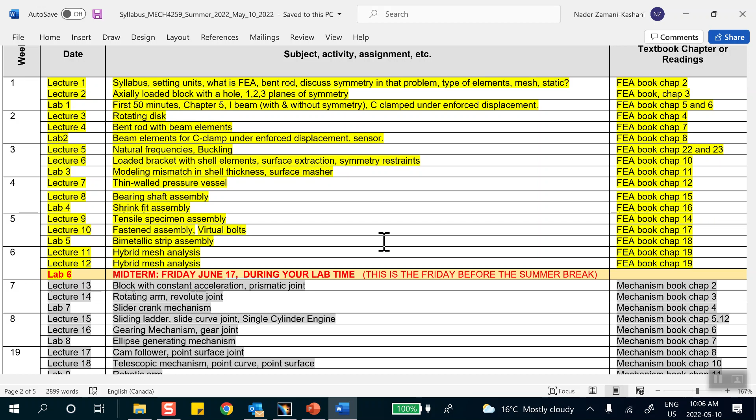The course syllabus on a day-by-day basis is here. There may be some changes, rearrangements, something may be left out, something may be added. I'll tell you, okay? But that's what it is. The yellow stuff is before the midterm. After the midterm, if you want, burn your book, burn your notes, because the subject is going to completely change, and it's not going to cover the stuff that you already did. And the final exam is not cumulative, okay?

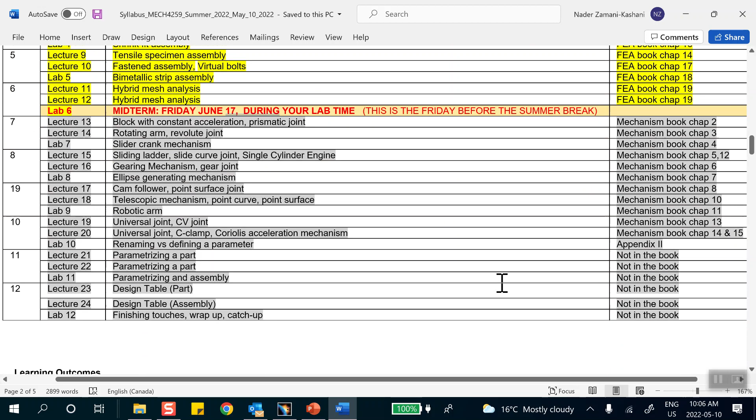There's your midterm. Oh yeah, lab 6, yeah, that's good. These are important things that you can read. It has to do with accreditation. As far as the breakdown of the marks is concerned, 10 assignments. Remember, there are 12 labs. One of them is for midterm, so that leaves you 11 labs.

One of them you can miss if you want, or if you got half a mark in one lab because you didn't do your minimum, let's put it that way, and you came to the extra lab, that 0.5 is going to get changed to 1. There's no problem. And at the end of the day, 10%, if you can breathe and you can be in the lab to show your work to the GA, you should be guaranteed of that 10%.

Okay? So I better watch what I'm saying, because these are being recorded and put on YouTube also, so it's not good.

Okay, the way these labs work is that I make a 50-minute presentation, 50 minutes, 1 hour, sometimes maybe 40 minutes. And then let's hypothetically say at 9:30, we give you an assignment. An assignment is a couple of problems, and we ask you to do certain things. Maybe do problem 1, maybe do problem 2, maybe do both, something like that. And the GA, once you're done at 10:30, not earlier than that. So 1 hour, we give you time to do something on it.

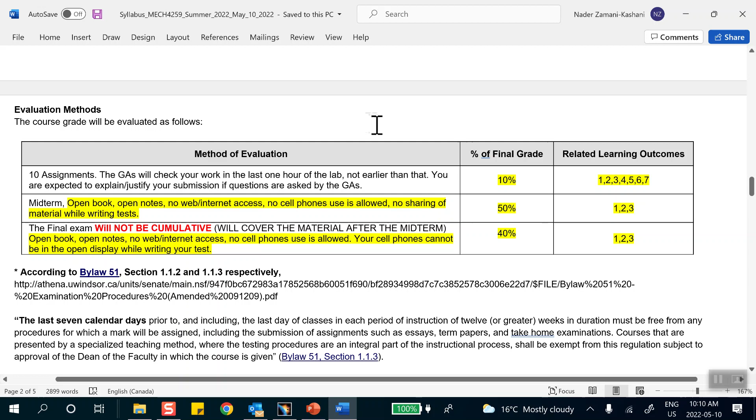Okay. As I said, if you miss the lab, unless it's a valid reason, a documented valid reason, we are not going to accommodate you. Basically, there's no makeup. It's around 1 point. But if you have a legitimate reason, it's okay. We'll accommodate you somehow for the 1 point. Maybe ask you to do a different problem, something like that.

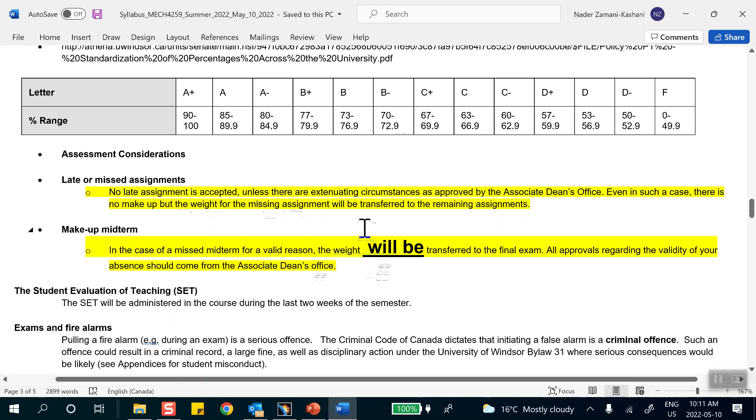Now, if the midterm is missed for a valid reason, and things happen, the weight is going to be transferred to the final exam. Okay, so there is no makeup. Even if it is legitimate, it's going to be transferred to the final exam. Okay. Now, yeah. Please make sure you read these things.

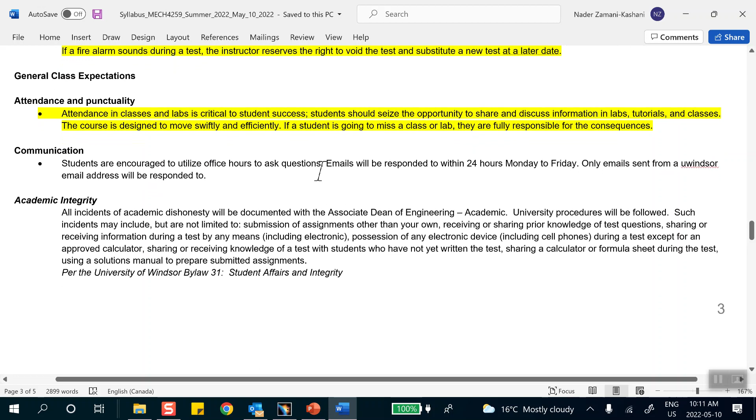There is something called supplemental privileges. Probably some of you know. If your GPA is such and such, and you have failed one course, the academic standing committee reviews your stuff. I think it's going to be sometime in October, and if they want to, they can give you a supplemental exam for one course.

There are supplemental privileges available in this course. Some courses don't have it, for example, technical communication and design and things like that, you can't go back and do it. But for this course, there is. We will give you the opportunity to basically redeem yourself, but that test is not going to be until December.

Okay, if you're given supplemental privileges, it's going to be in December, unless you're in Germany working for Schaeffler or some co-op in BC, something like that. Then I have to see how we can accommodate you for that supplemental. You don't have to come back here in December and write it.

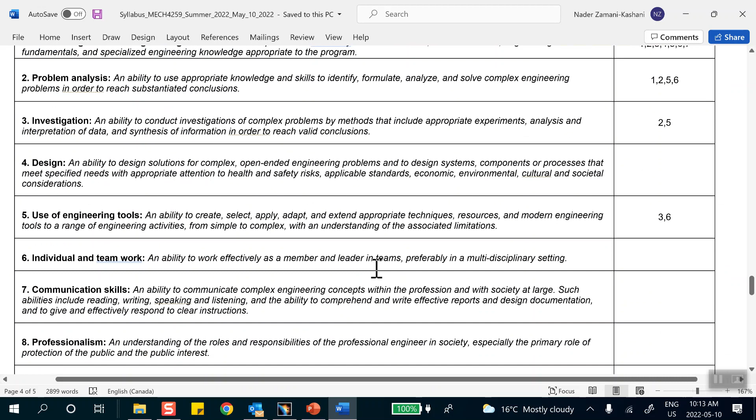Okay, there's really not much in this course syllabus. So let me go to the other document that also was posted. Where is it? Just bear with me for a second. This one. This also was posted for the past 2 weeks. And there's a couple of items that I want to bring to your attention. We already talked about most of the stuff that I wanted to, but

if there are any issues with your midterm, unless it's last minute, of course, that we'll look at later on, but if you know there's going to be a sister's wedding, brother's wedding, whatever, that you have to go to, please, in the next 2 weeks, okay? If you know it now, and it's a legitimate, reasonable request, you have to talk to me in the first 2 weeks. If you have letters of accommodation, first 2 weeks, okay?

I will contact those people who were allowed special accommodation, quiet space, and things like that. I will send them an email saying that you better do it in the next 2 weeks, because I don't want the day before the test, somebody shows up and says, I need special accommodation, I had the letter, because you're responsible for submitting those letters in the first 2 weeks of the course. Okay, good.

All right, now, everything is going to be recorded. This is stuff from last year, okay? I don't guarantee that everything was recorded and posted, including the midterm and the homework and the final, after the final was written, of course. But for example, if you go here, this is the lecture playlist. Let's see. The sound is not going to come out.

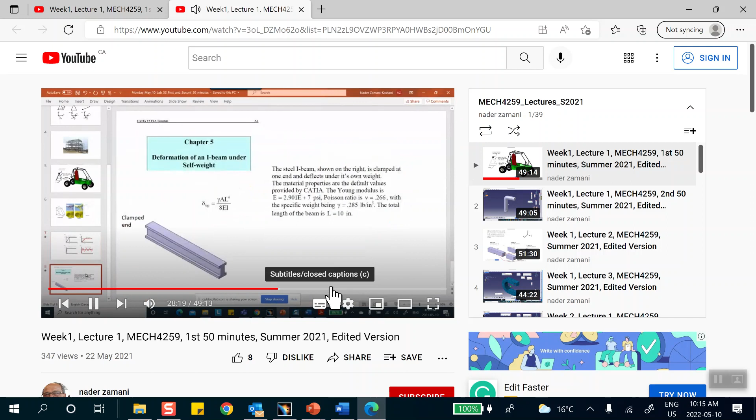Will be recorded. So you have many options: stuff from last year, stuff from 3 years ago, 4 years ago. Now, those were not your course that were recorded. There were other courses that I did some of these problems in, but it's a mishmash of different places in the channel. Okay.

Okay. What did I want to say? I think I said something. Any questions? No questions. Very good. Okay.

So let's get down to business, the real stuff. So we already did this. Now we're going to do chapter 2 of the book.

Okay. Now, for you guys, I have an extra 5 minutes. Good for you, probably, because I ran into some issues in the first lab. So they're responsible for that stuff also.

This is the kind of problem that you did in Dr. Green's class, stress analysis. I doubt that you did it in deformable bodies, but in stress analysis you did something called energy methods and solved one specific problem which should look like that, because it can be done analytically. Now, we're going to do it for this week. We're not going to do it with those little lines that you draw and say the cross-section is a circle and the I is this and A is that, etc.

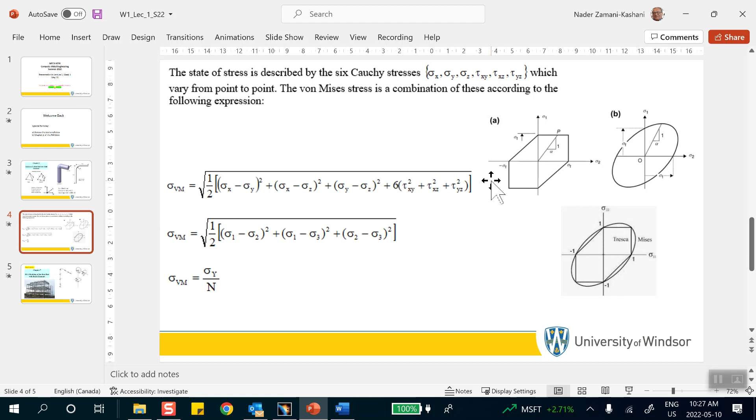Okay. Now, you might say, well, Dr. Green showed us how to do these problems with beams, and you're going to do that next week with beams. Well, why should I do this horrible-looking three-dimensional object, etc.? Hey, try to do this thing with those horrible-looking elements. Thousands of I-beams, etc. There's no way you can solve this with those solid elements.

So structural engineers, the first thing that they do is they model it as a bunch of beams, lines, frames, and things like that. And then get some information, such as displacement at the joints where an I-beam is welded to another. You get the forces there, a displacement there, and then out of that you can look at an I-beam as a unit, break out one particular I-beam, and look at the stresses based on the information that comes from the frame model. Okay. Anyway, so that's good. Any questions?

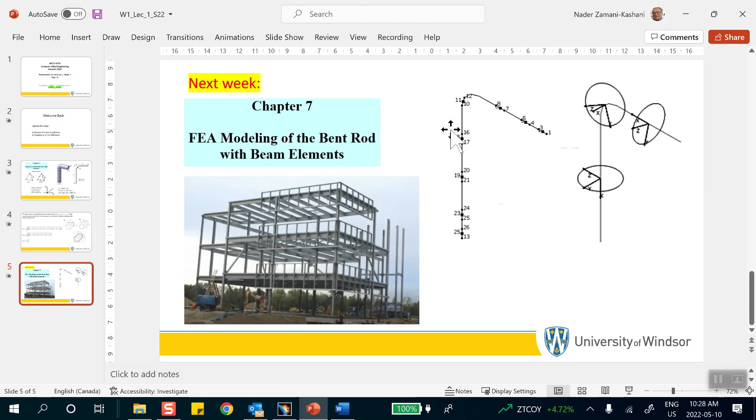All right, so we're going to do this problem. All right, so CATIA. When you start CATIA, by default, the way the system is set up, you can change these things, it gives you a product part. Products are a bunch of parts together, assemblies basically, and we're going to do assembly problems later on, several parts interacting. But for now, the first 3 weeks of the course are going to be single parts. So that being the case, I already killed that product screen.

Okay, I'm going to start the part. So it's a good idea to give these proper names. For example, my part in lecture 1. Because later on when you write a test, and there is an assembly of 4 parts, part 1, part 2, part 3, part 4, it's going to be tough to decide who is what. Okay, but here it's okay, I'll call it part 1.

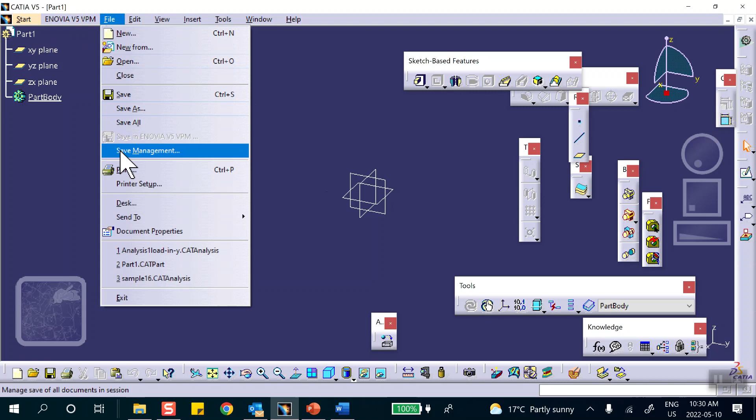But the first thing that I'm going to do, I'm going to save this, because I don't want my system to crash in 5 or 10 minutes when I haven't saved anything. It's all gone. So let me save this part in a folder that I can recognize. And the way I strongly suggest, go and review the stuff that you did. These days, just go type save CATIA in YouTube, and it tells you these things, okay?

You don't need me or Dr. Pushka to tell you that. There is a thing that I created. You're going to save as, folder, desktop. I make a new folder. I will call it group 1. How about that? Because when you write a test, you're going to have to upload your parts. In this case, one part and one analysis file.

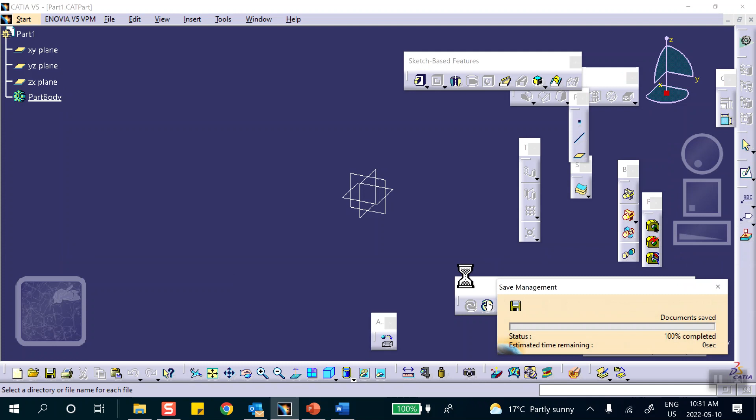If you have an assembly, you have to create all the parts in an assembly, and the product, and other products if there are any, and analysis. So you got to put the stuff in a place where you can find them. You don't want to look around and see where it went. So group 1 there. So that part and the analysis that I'm going to create in just a minute is going to go into that folder. Okay. Say okay, of course. So yeah, good. Let's make it.

So on this horizontal plane, I'm going to make a sketch. Oh, by the way, I've changed my units. If you don't remember how to change your units, watch my video from last year, or come and see me, or go on YouTube: setting the units in CATIA. They'll tell you. Okay, so I'll change it so that it's inches and PSI and things like that. So sketch

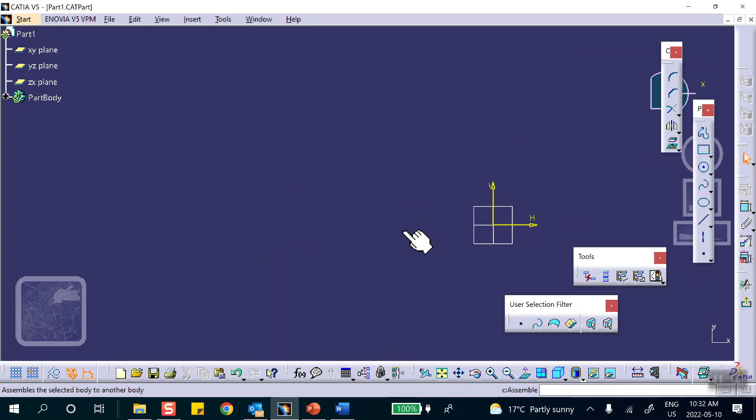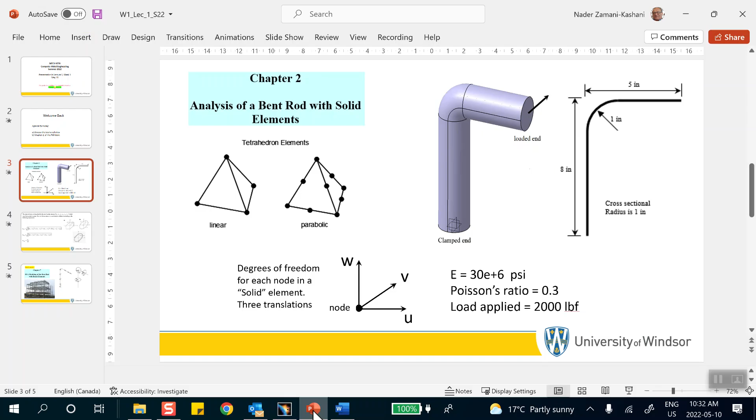a circle. It does not have to be here at the center, but I will put it at the center. And the radius of that, in that drawing, it says radius 1. So I'm going to dimension this, radius 1 inch. Good. Exit. Now, this thing looked like that. If I pad, it goes straight up. So that's not going to do me any good. So I want it to go along some kind of a curve, okay?

CATIA has a name for that. Does anybody remember what that name is? Yep. Okay, that's good. Keep that in mind. Anybody else? Rib. Because software to software, these names vary. In SolidWorks, they call it sweep. CATIA calls it a rib. So you should be aware of these issues. So let's go and rib it. But the thing is that I need the path here, the path to rib along.

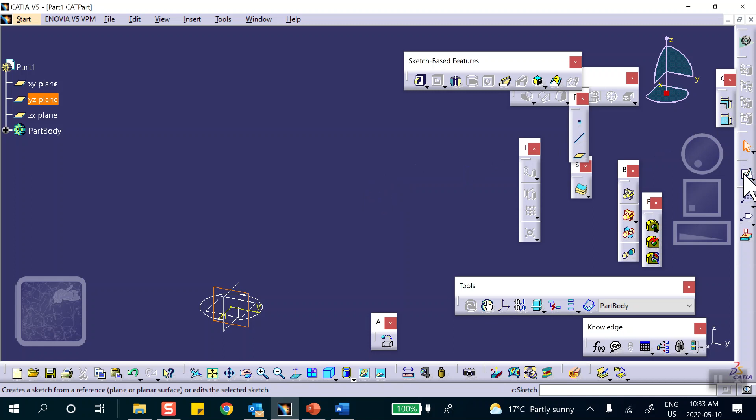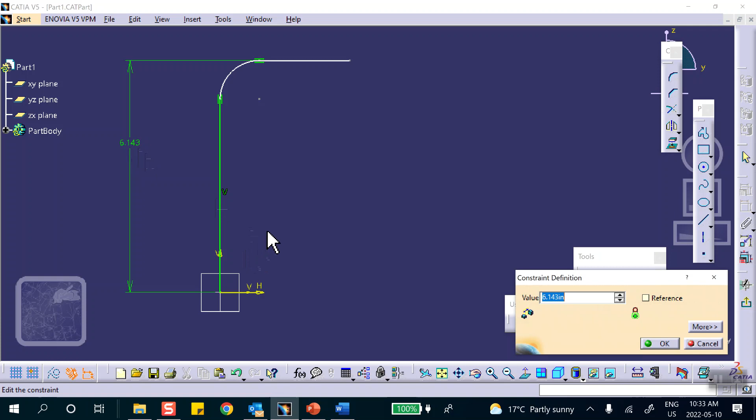Okay. So I'm going to select this vertical plane. Doesn't matter which one you take, and sketch on it that path, that spine. SolidWorks may call it spine, or here they call it center curve. These are all different. Okay, well, not this. There. So let me make that. Something like this. Let's dimension it. I think the dimensions in that problem, and I'll talk about dimensions in just a minute again, this was 8. And then here to here is 5. And this thing is 1.

Let me say a few words about dimensions. If we gave you a problem like this on a test, and we told you these are the dimensions, the problem has 20 marks. And you either did not pay attention, or you waited until the last minute and it was too hard to read the stuff, and you just decided this is going to be 4, 5, radius is 4. You're not going to lose that much. Hypothetically, 1 out of 20, everything else right. Because either you can't read, or you don't want to read, or you put yourself in that position. Time was running out. You have to pay a little bit to be fair to the other people.

But not much. So if you left this thing as 1, don't worry about it on the test, or here in the labs. Sometimes I go ahead and make my own dimension. Unless it's a critical issue. What do I mean by critical issue? If you make the fillet radius 5, it's not going to do it for you. Then you put yourself in that position. But if instead of 1, you use 1.3 or 0.7, it was just careless, that's all. In critical things, you have to worry about it because you're not going to be able to finish the problem. Simple as that. I'll make it one. Let me dimension it.

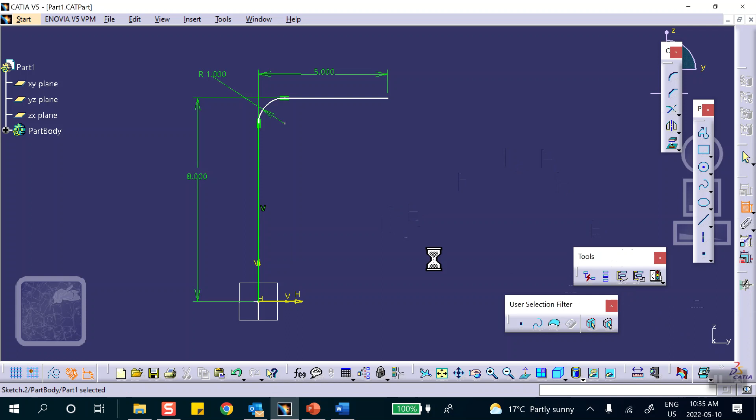Excellent. Exit. Remember, I don't want the power to accidentally go, so save it. Just click on the floppy. It'll update whatever you saved in that folder. Good.

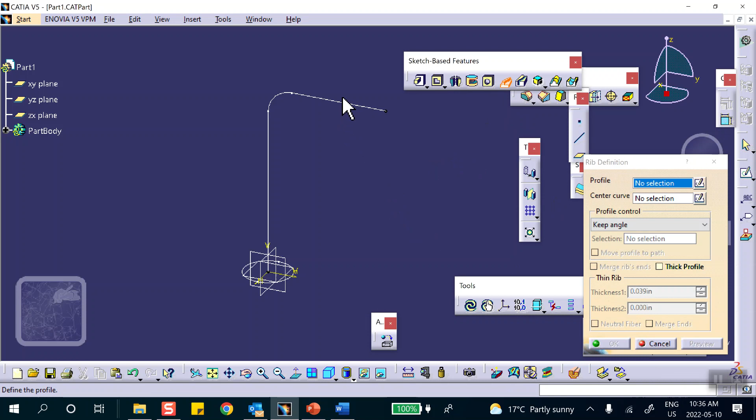Oh, now we have to do the rib. There's the rib. There's the pad. There's the rib. Let me cancel that for a second, because I want to show you something. Okay, so I have two sketches here, right? Sketch one was that circle. Sketch two was this thing.

Okay, so let me rib it. And notice that this is orange. I didn't mean it, but accidentally I selected that sketch ahead of time because I was rushing through this. When I try to rib it, some people panic, they don't bother reading, or they read and don't understand what it says.

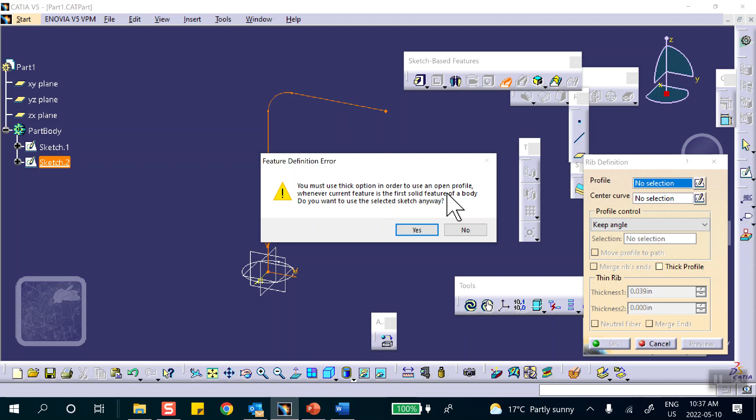What it's saying is that the curve that you want to rib, my circle, must be a closed curve. But because this was active when I did the ribbing, it thinks that I want to rib this thing, this L. I don't want to do that, it was just an accident. So don't panic. Just cancel it. Make sure that this is not selected. If it's not selected, now rib it.

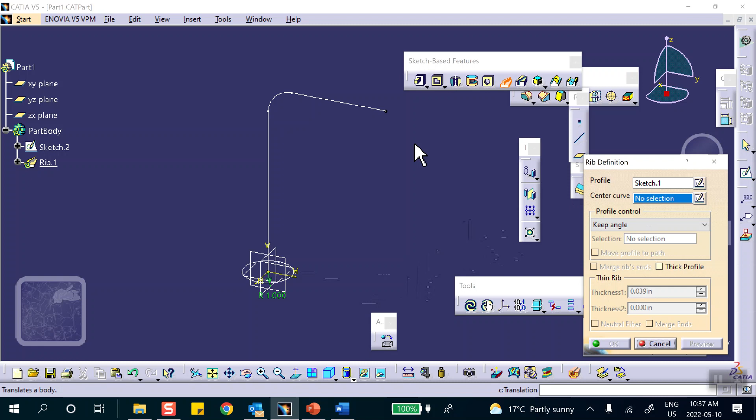And it says the profile. The profile is that curve. It thought that the profile was that inverted L. And the center curve or the spine, which is sketch 2, or you can pick it from the screen, and it goes like that, and it's all saved.

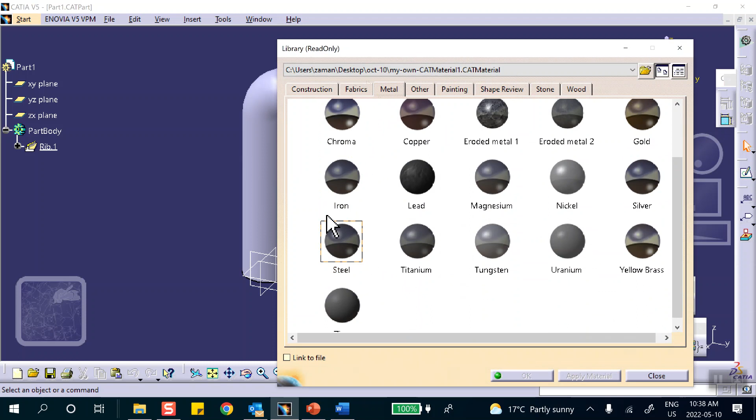All right. Now, the rest of the problem is we have to apply material to this thing, because without applying material, you don't know what the response of the bar is going to be. Aluminum, rubber, steel. So I have to apply the material. Apply material is this icon, metal, steel on that part, and okay.

If we insisted that the material have a Young's modulus of 30 million psi, then you better make sure this is 30 million, because you don't know what came out of the database. Double click on it, select the analysis tab, and this is the default value in CATIA, 29 million and 10,000, something like that. If we insist that you make it 30, then change that to 30. It's accepted. I'm going to leave it the way it is.

And Poisson ratio does not have a unit. You already know that. Density we don't need because we're doing a static problem. And yield strength, totally useless. CATIA does not do yielding. It does not model plasticity and things like that. So what is this doing there? Well, they want some generic number. This is some kind of steel.

Yield strength of steel depends on the heat treatment. The yield strength of a submarine hull is different from that of an I-beam in this building; for the submarine hull it could be 10 times bigger. Here's a very good piece of advice somebody gave me 30 years ago. I was always confused with yield strength, but okay with Young's modulus. He told me, for metals, if you know the Young's modulus, just knock out 3 zeros, and it puts you in the ballpark.

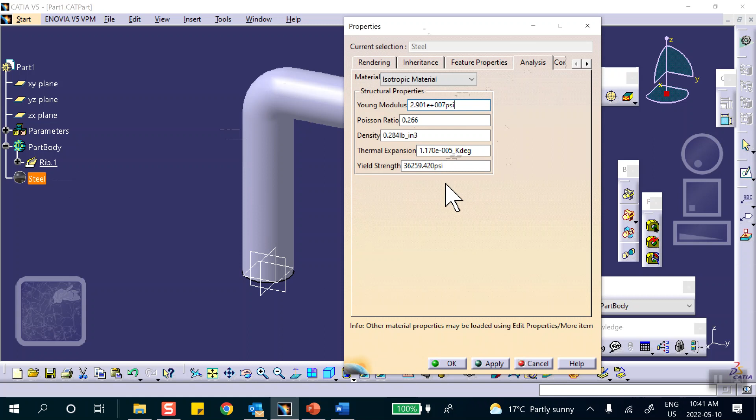Anyway, it's just there for people to look at. We're going to keep it like this. I'm going to save this again. All I have to do is click the floppy. I don't have to go to the save manager unless I want to change the name and things like that. What is this?

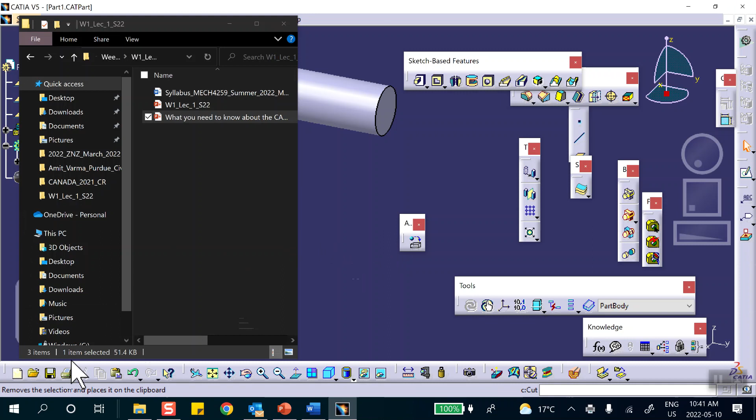This is what I did, right? Oh, printer? I don't know what I did. It's okay. I think I clicked on something else.

Now, from this point on, you're going to go to generative structural analysis. When it comes to doing FEA in

No. What time do you start? We start at 10. Yeah, 10 minutes. Okay.

When it comes to doing FEA, there's 2 workbenches you can go to. One is called generative structural analysis, right up there. And at the end of the day, you should always go there because that's the only place where you can apply the loads and restraints and things like that.

But for meshing purposes, there is something called advanced meshing tool, down here. So if you want a fancy mesh, if you're designing an instrument panel, you need fancy mesh, okay? But for Mickey Mouse problems that you're doing, you can do 99% of the stuff in this course by just doing it in generative structural analysis.

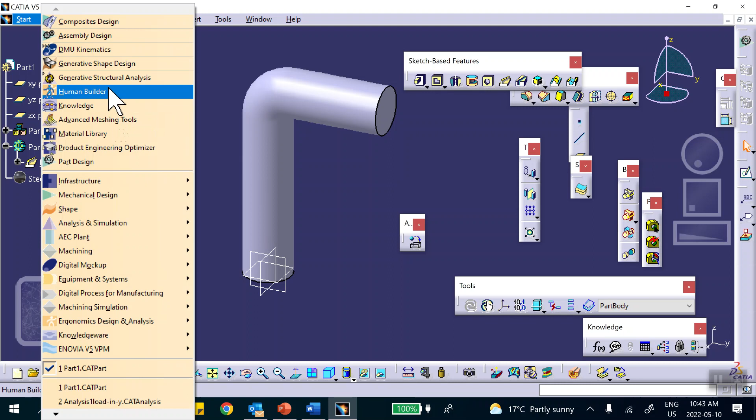Okay, so we go there, generative structural analysis. The screen changes, the interface changes. You don't recognize any of these except for the utility icons down here. And the first thing it asks you is do you want to do static analysis or dynamic analysis?

Okay. I said apply 2,000 pounds to that face. The bottom is going to be flat. Apply 2,000 pounds to that face. Is this going to be static or dynamic? Static? Okay, let me ask you this. Here's my piece. Actually, I want to apply 2,000 pounds like that, so that it kind of turns.

What is it initially that I'm applying? Initially? 0, right? There's no force. I have to build up to 2,000. So no force. Push, 2,000 pounds. It's going to turn around and go. Slowly push it. Static. Not time dependent, because the force you apply depends on time. You're applying this force as a function of time.

That's the static problem. But if I took a hammer and hit it, or instead of slowly applying the force with this poor finger, do it right away, it's as if I hit it with a hammer. It becomes a dynamic problem. So the duration of the application of the load tells you whether it is static or dynamic. In this problem, I want a slowly applied load, and therefore I pretend that it's a static problem. Static, default. Say okay.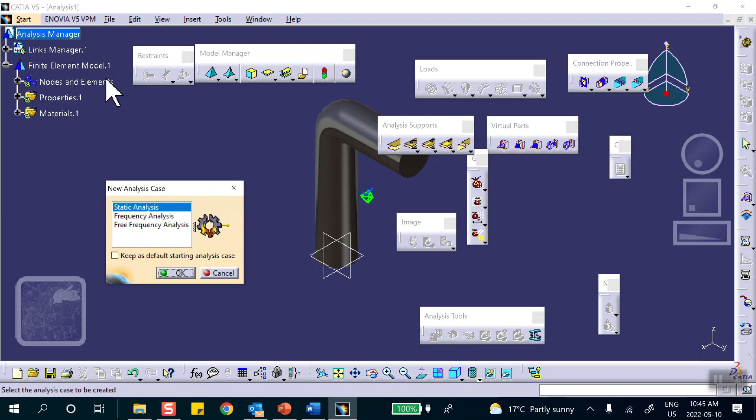Okay, notice what happened here. First of all, let me change the rendering so that when you put material on it, it looks like that. So it took that part, CATIA, using a stupid rule, broke it down into elements of that size. I say stupid, it's just a bad way of saying it. It probably says, take the biggest dimension of this part and take a thousandth of it and use that. That's just based on the size. It may not be good for you, so you may decide you want a smaller one.

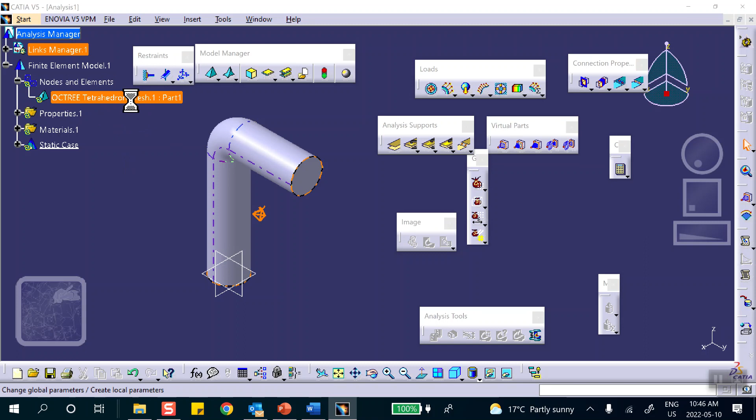No problem. So notice that under here is nodes and elements. This is the one that it created. You can change that if you double click on it here or on the screen. So size is 0.563. Let me make this thing 0.25. There's also this thing about sag. We'll talk about it later. Just watch that green element. I chose linear and I chose 0.25.

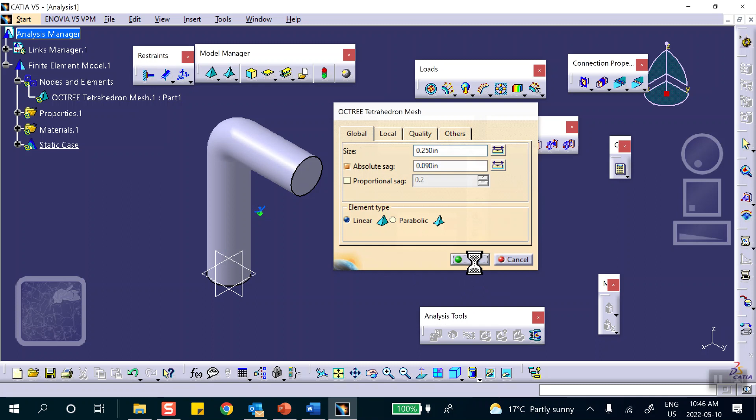A lot smaller. If you want to see the mesh, you put the cursor on nodes and elements right there. Right click, mesh visualization. There is your mesh. Okay, so if you want to go beyond this, you have to get rid of this guy that's staring at you. This is not the part. You can only apply loads and restraints on the part. This is the mesh. I don't want it in front of me because there's nothing I can do with it.

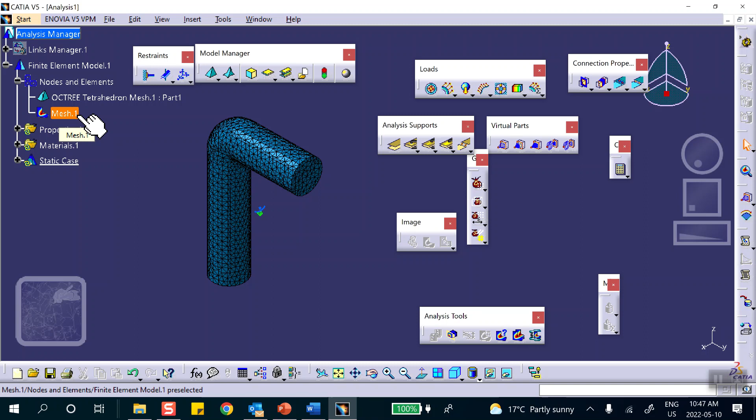There's several ways of doing this. One way is to put the cursor here and just delete it. The problem with deleting is if you come back tomorrow and want to do the problem, there is no mesh there. Actually the mesh is there, but it doesn't display it for you. You have to say, show it to me again. But anyway, deactivate it. I shouldn't say it's gone. Deactivate it. Right there.

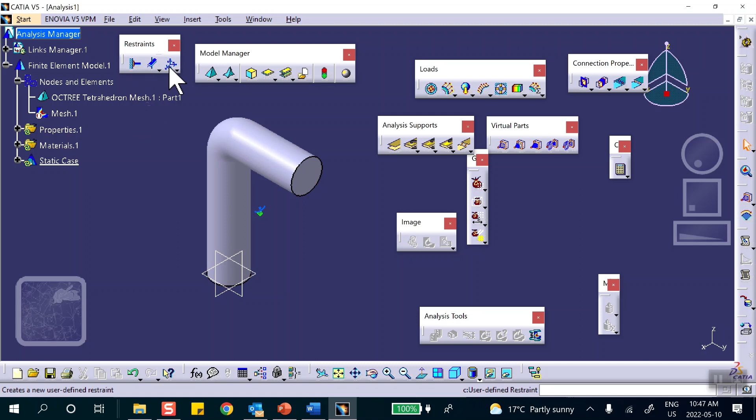Now I can apply my restraint and the load. So this restraint right here, see that? This is familiar to you? The anchor, what do you call this? You call it clamp, right? Okay, there we are. Don't worry about these things later on. Clamp, it says what is the support? Now this is where you have to decide, should I take the bottom or should I take the edge, or even both? I mean, taking both is dumb, but anyway, this is one face, okay? Because when you take the face, it'll take automatically the edge for you.

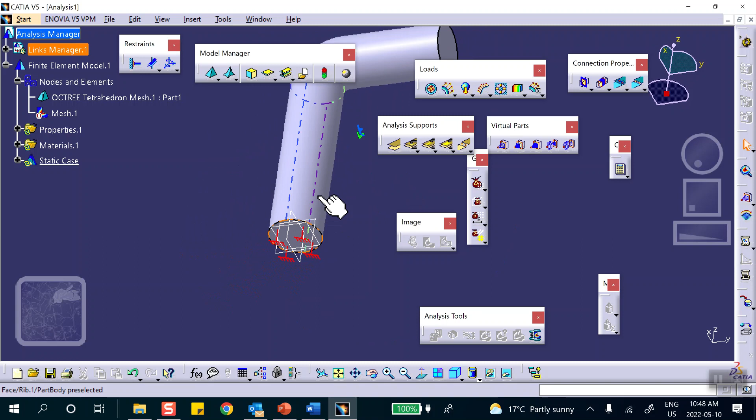Okay. Now, here's the clamp that was created for you. You can always see it in the tree. Restraint is the clamp. If you want to make changes, you can click on this or click on that. It doesn't matter. And then the load. Check the loads toolbar right there. There we are. First one is pressure. This one says distributed force. Don't worry, we're going to do these. We have 5 more weeks to go, 6 more weeks to go. We'll do it. The second one says distributed force. On what? On that face.

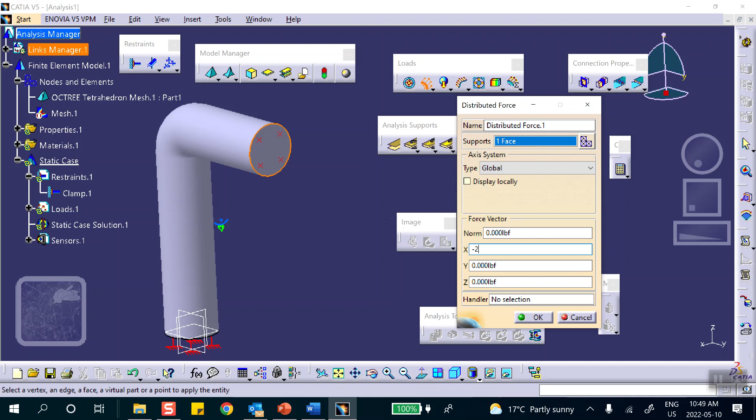On that face. With the first group, I did a little bit of change. I put it in the Y direction. That's not what I want. Look at this coordinate system. I want it in the X direction. So let me get the Y out. Put it in the direction of minus 1,000. No, not 1,000. 2,000, right? Minus 2,000. There we are. That's better. You can always make changes by double clicking on that or there. Minus because the coordinate system shows you. It really doesn't matter in this problem. Even plus will give you the same response. Okay, good.

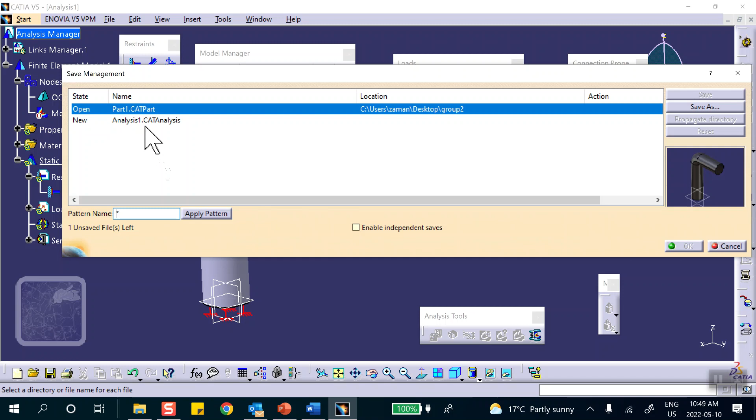Now, this is it for this problem. Very simple problem. So first thing, save. Because if the system goes down right now, my part is safe, but not the analysis. A separate file is created called analysis file. You better save that because if the system goes and you haven't saved it, whatever you did is going to be lost. Not the part. So you go to File, Save Management. Here's the analysis. You may want to give a different name if there's several of these you're going to do for different loading conditions and things like that. But for me, it's okay. You just do one. And I'll just save as. Same name. You can always change the name, etc., and say OK. Save it here and say OK. So now if the system goes, this stuff I already have.

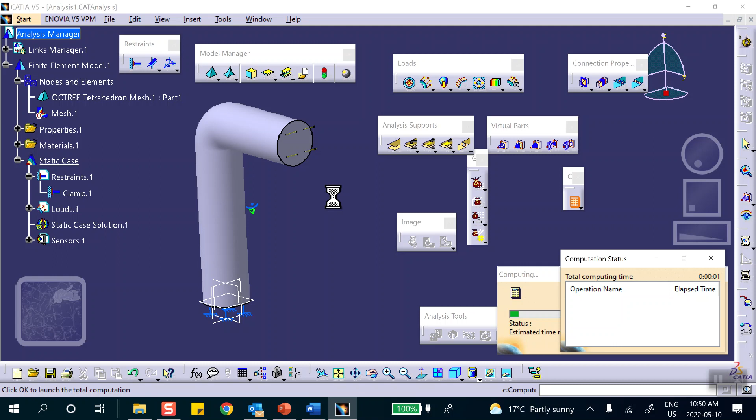OK. And we can run it. The running is done in this icon, which makes it look like a calculator. Okay, and in fact, it says compute. You click on it and say all. We're almost done here. We will say yes. These numbers are totally useless. They give you some idea, and those ideas are not right. How long it's going to take CPU time, how much disk space; disk space and stuff like that may be okay, but that CPU time, unless that number is very large. If you see, for example, 2e to the 5 seconds, it's going to take a long time to do. But these are Mickey Mouse problems.

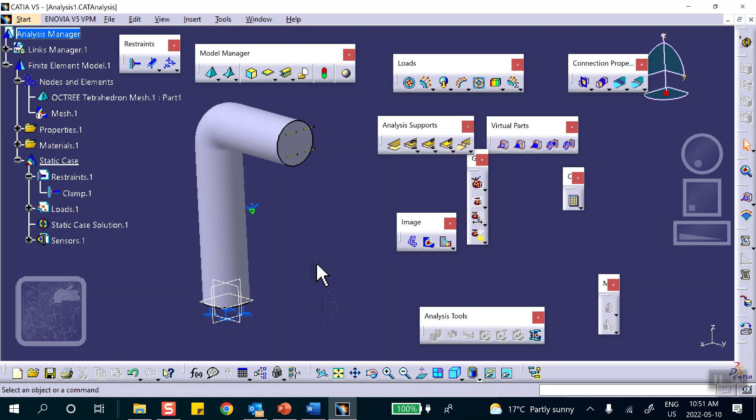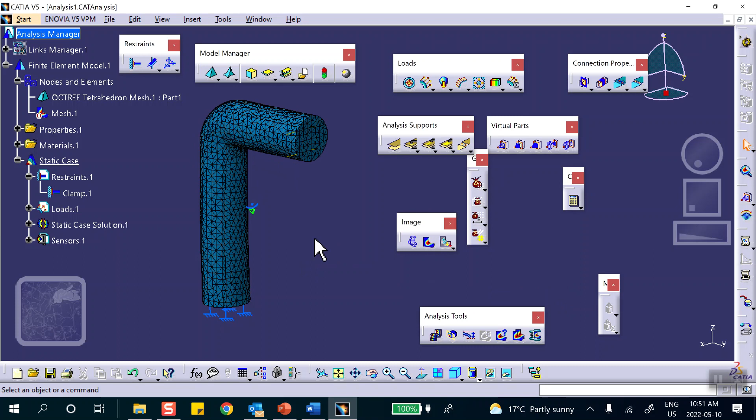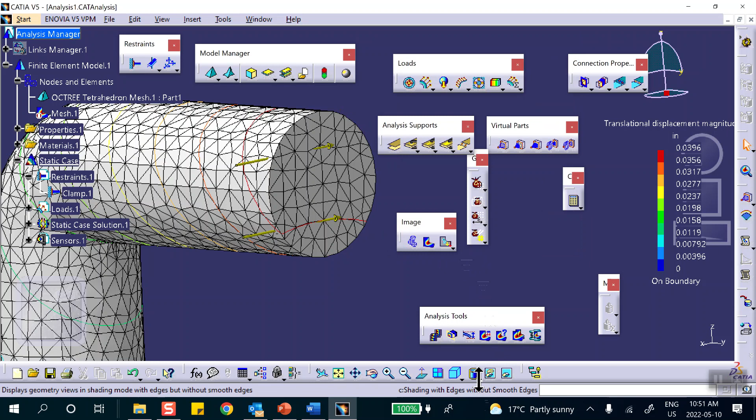If you want to see the deflection, just the shape, there we are, under images. You can animate it. And we usually do that to make sure that we didn't forget anything critical, okay? If this was going up, there's a problem with your load somewhere, probably; go fix it. So this is okay. If you want numbers, you go to displacement, give me numbers. You click on it, and there we are. If you look closely, you see that at each of those nodes, you have a displacement, 3 components. Remember 3 degrees of freedom? But I don't want to see it like that. I want a contour. So you can click on the screen on that contour, say, show me average ISO, and change the rendering. There we are. Red means that anything in the red region deflects between 0.0356 inches and 0.0396 inches. Okay? Did you used to get this?

Just see that on the images. The one on the left is deflection. The one on the right is displacement. The one in the middle is von Mises stress.

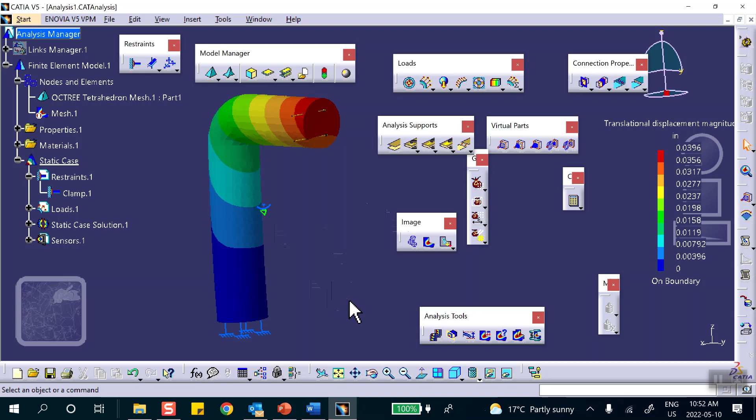Remember, you have 6 weeks to get here. And the whole purpose of this, and it's a bad idea to try to just write it all down. These are going to be posted. Watch it. There's no way you can follow me like that, just see what's going on in the class.

Here's the von Mises stress. Now, a couple of comments here. Let's hypothetically say that this top horizontal piece was very long compared to the base, and you apply the load there. Where would you expect this thing to fail? Use your common sense. Where? Very long. You apply a force there.

Yep. The curve. But if this was fat and short, not necessarily fat, but it was short compared to the height, then right there. So that's why you have 2 kind of critical areas here, and which one actually will cause static failure depends on the relative length of these things.

Now, there's two other items that I want to tell you. One is this looks patchy. I don't like that. Maybe my mesh is not good, and that is true. My mesh is not good. So let me do the first thing. Use, instead of linear, parabolic elements.

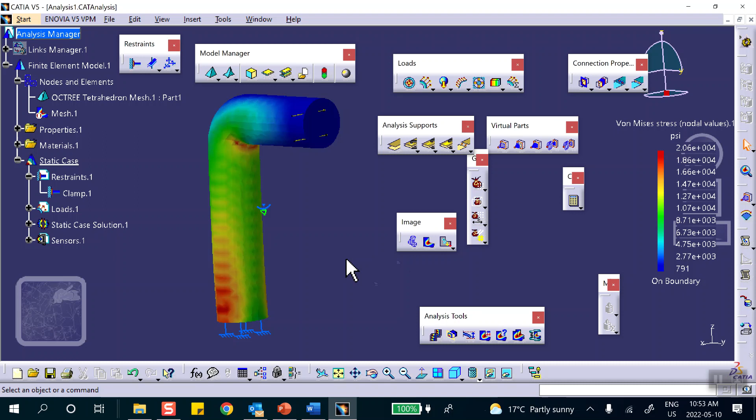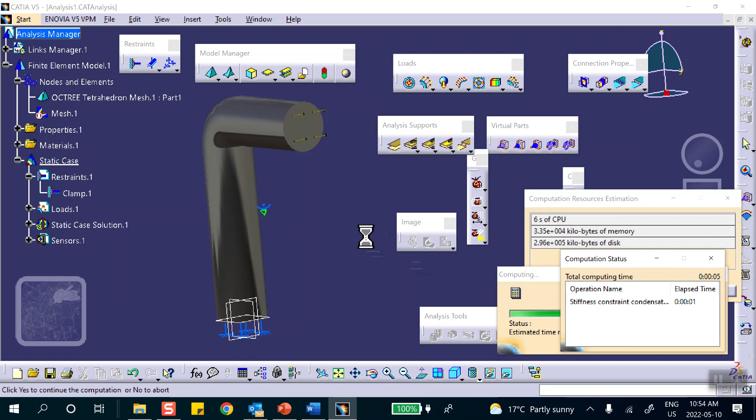So we go here. Instead of linear, which I insisted on changing because I did it with the first group, I change it to parabolic and run it. More accurate. That's what it is. More accurate. It takes longer. Not for these problems. And after I show you this, there is one last item that I want to do. I'm going to take about maybe 2-3 minutes.

What is that thing that I created? These are the things that I created. These are the 3 graphs that I showed you. I want to see von Mises stress again. Activate. All that patchy stuff is gone. That's the first indication that the mesh you took initially, there's something wrong with it. Okay? None of these are reliable. None of these. We'll talk about that later on.

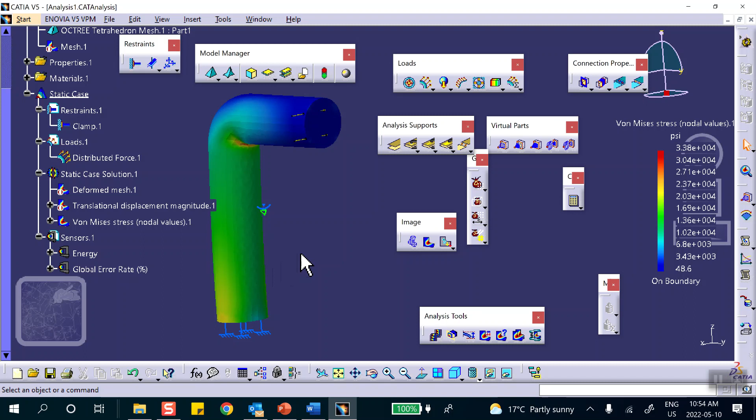Last thing for today. Suppose this load was actually applied to the face, perpendicular to the face, instead of making it bend. No problem. I'll go and change the direction. So I go to the load. Instead of in the Y direction, I take the Y out. Instead of in the X direction, I take it and put it in the Y direction, 2,000 pounds.

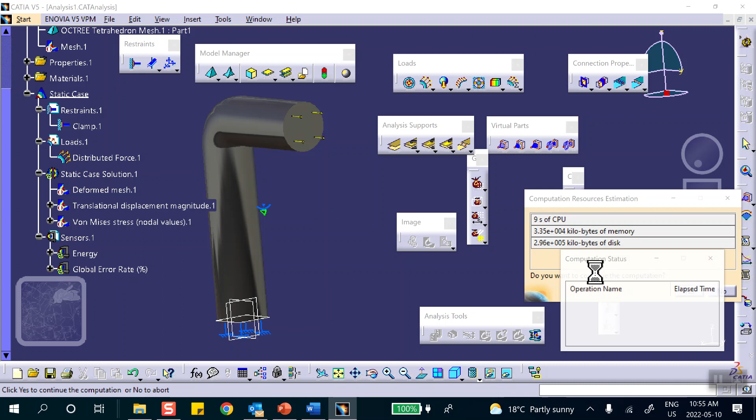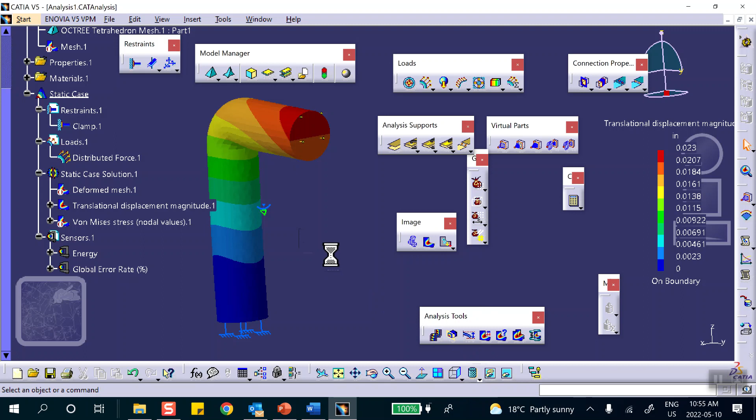And you're gonna appreciate this 2-minute conversation. Run it, because how you do on the test depends on the next couple of minutes explanation of what I'm talking about. Let's look at the deflection, for example, or stress. We can look at either way. Okay, and look at the view from the front. View from the front. Come on, front. There we are.

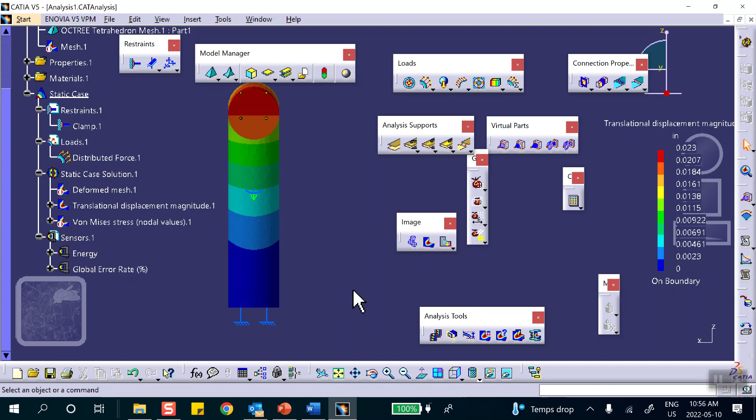So this time, the force is coming towards you instead of making it bend this way. Look, deflection on the left, deflection on the right, they look the same. If you plot the von Mises stress, let me deactivate that. Activate von Mises stress. Huh? Everything looks symmetric. So the biggest part of this course on the midterm, we're going to take every problem and use as many planes of symmetry as are applicable. In other words, you should not have modeled this. You should model only half of it.

Number one. Number two, the 2,000 pounds that you put in there should not be 2,000 pounds. What should it be? 1,000. Half of it, 1,000. Is that good enough? No. Out of 20 marks, you probably need another 3 marks. Because that middle plane moves like this in a plane, like a roller. So you have to put roller support on that plane that you created.

CATIA does not call it roller. It calls it surface slider. We're going to do that later on. We're going to do every problem we're responsible for using as many planes as possible. This is it for today. Remember, a big chunk of your mark on the midterm hinges on this business of understanding symmetry. And don't just make half of it, because you forgot half of the load, you forgot the surface slider.